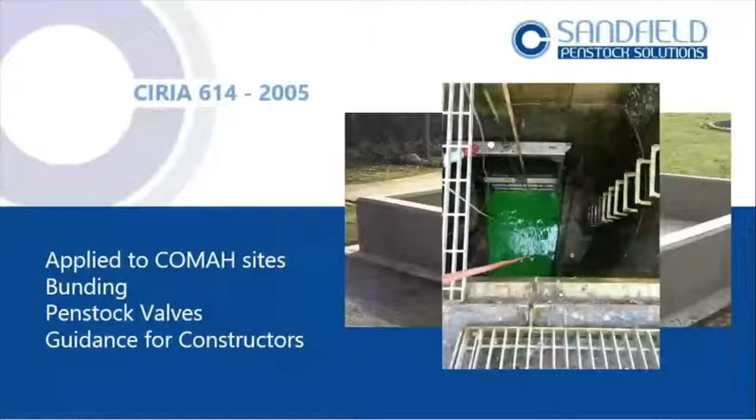And as I say, it's mainly for the construction industry. So it wasn't really being read by customers. It was looked at by the people actually building the site.

And I've just shown you here an image. This is showing a penstock valve. This is a recent job that we worked on. This is very similar, nice little actuator, penstock sluice gate valve. This valve here actually is in good condition, nothing wrong with it, but it's losing 2,500 litres an hour. Obviously the green is the dye that we're doing a test with, but that valve actually is of no point whatsoever.

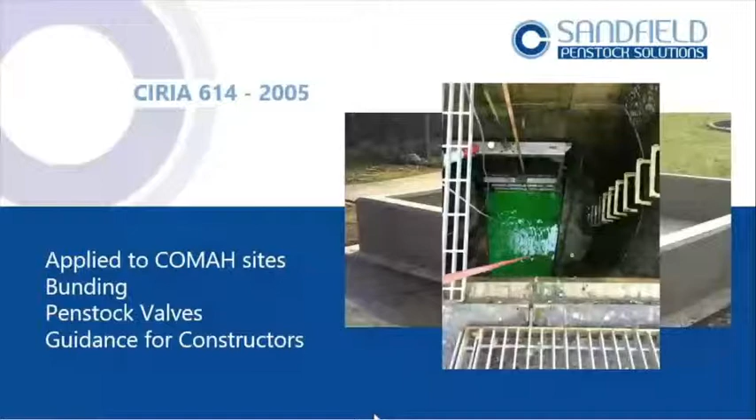The interesting thing is this design that if there was a fire, it would be a controlled burn. So they weren't really going to chuck lots of stuff on it. They'd have it as a controlled burn. But because COBRA had to sit, because we've got a problem with this ash cloud moving over to France and causing quite a significant impact, it was decided to tackle the fire. And the significant part of this is it's not the stock that really causes the pollution. It's actually the firefighting materials that's caused the water pollution.

So CIRIA 736 comes in, and that's the thing that we've been sat there and I've been brought into because of my background. These are the things that are coming out of the initial meeting. A document that's universally applicable to every site, not COMAH sites, all businesses, even a one-man band owning a garage. We're saying that they should understand what happens in my garage if I have a fire and I've got a load of barrels of oil, cutting oil. What's the impact I could have on the environment?

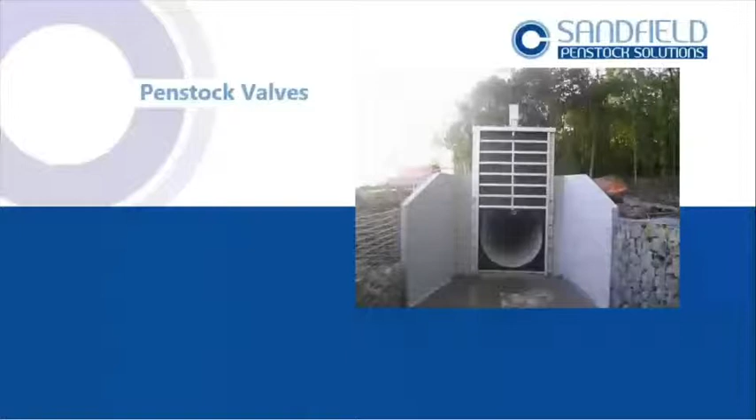Penstock valves, a bit of a bugbear for me, is because these are what people install and keep installing. They're not really fit for purpose. They were never designed for flow control and some isolation. You've got to have the right product. You've got to think that when you have a fire, could be part of a power cut. So these devices must work when there is no power. So they need to be off grid.

You can't have them connected into the main compressor line and running off an air line or running off mains power if the first thing that you've lost is power and you can't control the valves. They're normally out in the sort of middle of nowhere as well at the end of site. So it's very important that there's some sort of off-grid controls to them. They've got to be operable, as I said there. So they've got to link. So you need systems that are designed specifically for that.

Very little thought is put into what this valve is actually going to do. It goes up, it goes down. Nobody bothers to check whether it actually seals the flow, which is absolutely essential. They've got auto monitoring, but they're quite slow. They don't react very quickly. They're not really the right product. They never were the right product.

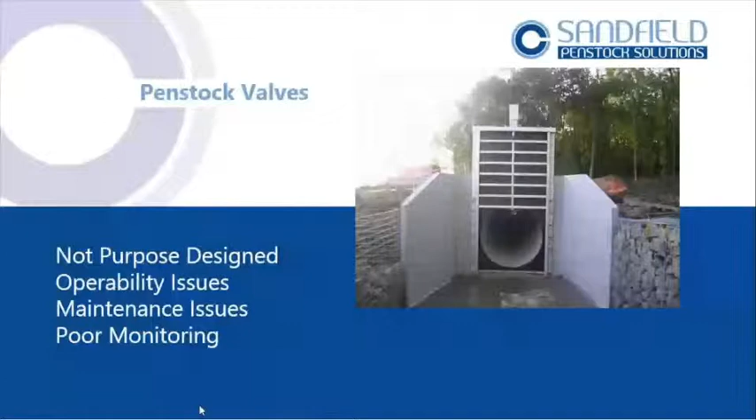They're a flow control device with fantastic uses in the water industry and where you've got considerable flows. What we have to look at here is when you're looking at pollution containment, there is no pressure. The flow is just a nice gentle trickle potentially from the site just running into the drains.

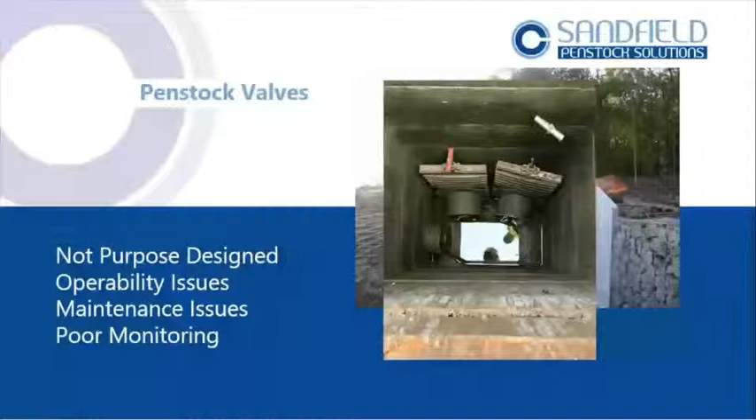So you can see some of these pictures that I've just put in here. These are typical examples of what we see at sites that are fitted with systems. No thought. These valves have gone in, great idea, but no ability to actually get in there to maintain them. This one is actually a good one because it's a site that I dealt with, which is one of the case studies in the CIRIA guidance on page 162, if you want to read it.

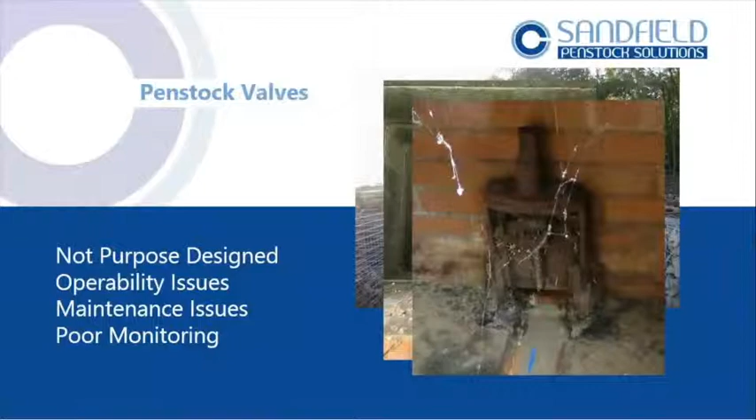This is where a penstock valve was closed as part of a tertiary system, and it leached cyanide into the River Anker and caused a major fish kill. I think it was 33,000 fish in total. Significant impact to the business. And that is just because of the wrong products.

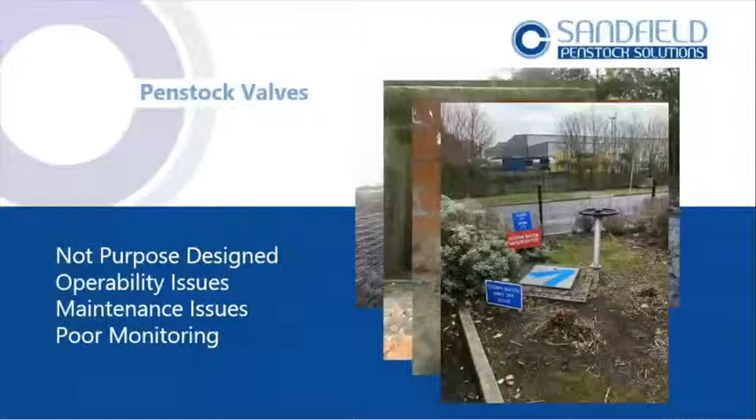And these are typical where you've got manually operated valves. In the event of a fire, can you actually operate a manually operated valve when you've just evacuated your site? Have you got the right people there? And do you know it's actually worked? Another typical example where somebody's put a penstock valve in and then decided to concrete around it. So it's a non-serviceable item.

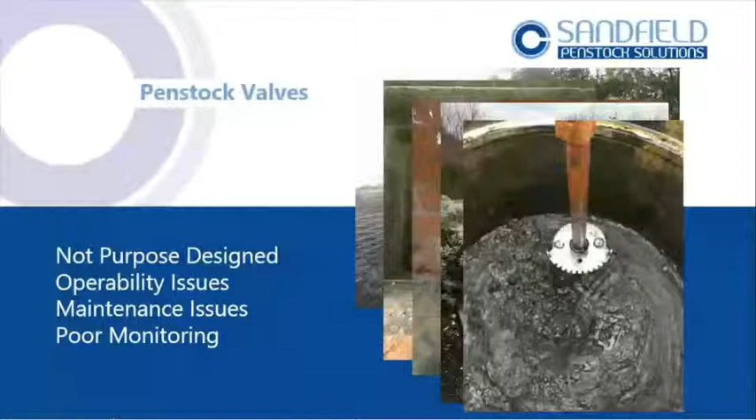With these bits of kit, there are significant changes within the guidance where we're asking people to service these systems and show they're serviced and show they're working. So a really big driver to the technology, which I'm going to come on to next, is the sentencing guidelines. Hugely important if you haven't really understood this part of it, but we've created a punishment, a deterrent, and the removal of any financial gain.

So in other words, if your business is running at a risk where pollution is insignificant, we don't worry about that. And there are a lot that do that, and a lot that don't. The fines are based on your total group turnover. So you might be a small part of a large company, but it will be based on your total group. If you're owned by a big international investment company or you're Thames Water, your fine is related to your total group turnover, not profit, turnover.

That's the step change, with a lot of businesses suddenly realizing that the management of water and what happens when a disaster takes place needs significant investment. It needs good drainage design. It needs good containment design.

Thames Water, obviously, you see there, £20 million fine. I think you'll also find Tesco was fined in 2017, I believe. That was for quite a minor oil spill, really. But again, it shows that if you're a company of that size, you shouldn't be having these pollution incidents. You should be employing the best technology and the best systems to prevent them happening.

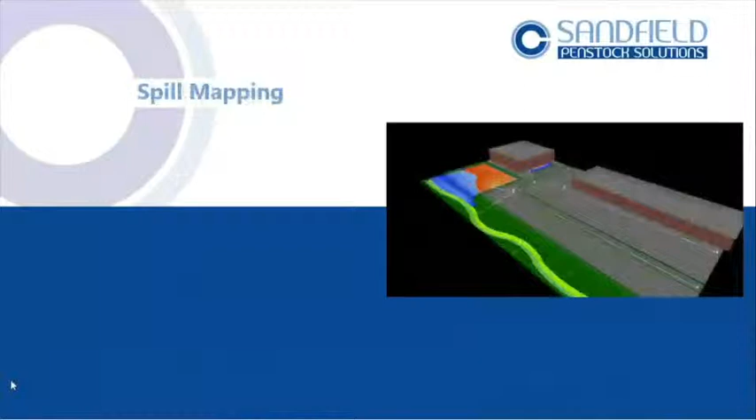So now I'm coming on to our products and products that I think are significant. Something I call spill mapping. If you read the CIRIA guidance, you'll see it's a case study on page 130. And this is a replica of that site to create a much simpler image that I'm going to show you.

What we found with Buncefield, whilst I was on the committee, was that Buncefield had no evidence or idea what a pollution incident would look like. Why this is really important is because people were placing containment valves in, building tertiary containment off drawings. So there's some effort going into it. But if you're the owner of a site, you probably don't have the skills to understand that drawing. So what I could see was that sites were installing and investing in equipment with no actual evidence that what they were investing in actually worked.

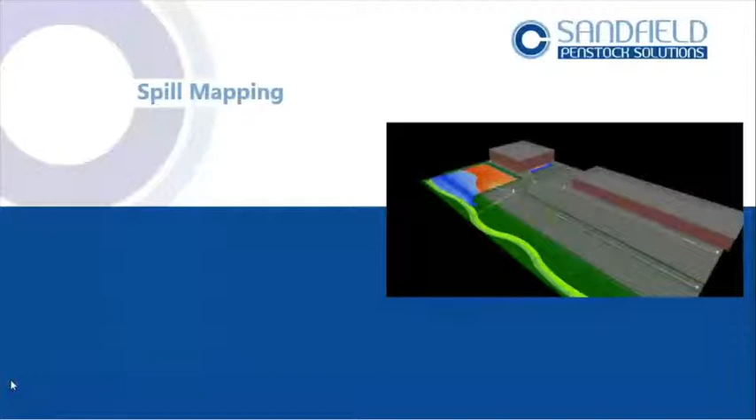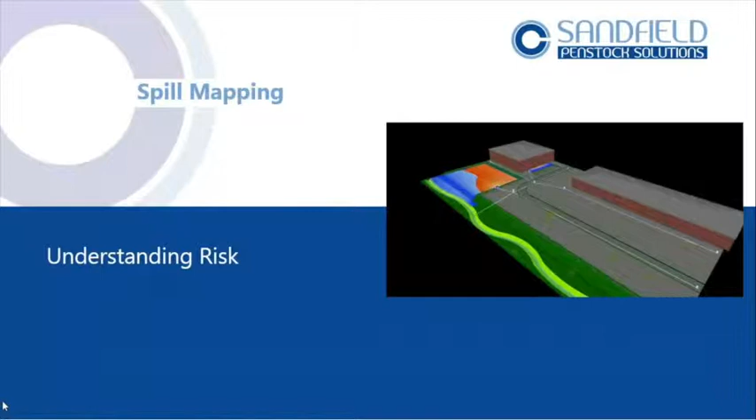So where you go now into the CIRIA guide, understanding the risk, you'll see there's a section 4.3.3. Now this is about looking at how rainwater impacts a pollution event. So as I'm doing the guidance, we're looking at this because there is no sort of benchmark, and we realize that the guidance is allowing us to set up a system so we can actually empower decision makers by using what's set out in the guidance to say a 1 in 10 year rainstorm event, loss of whatever stock we're considering we're going to lose, and whatever your firefighting response is going to be, gives you a volume.

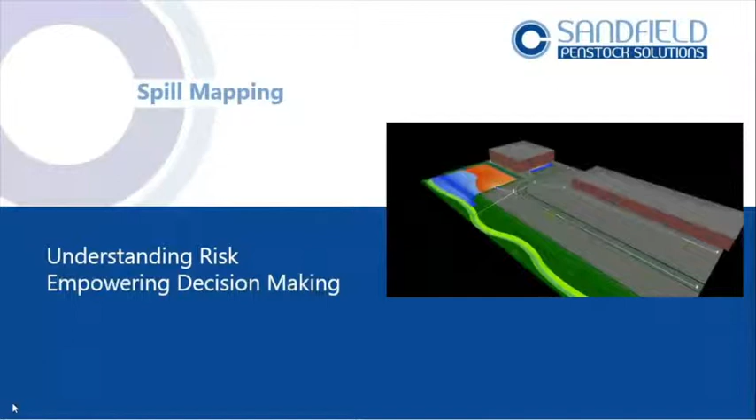And by that volume, through MicroDrainage or TrueFlow, whichever software you're using, you can actually then carry out your flood modeling software, which the Environment Agency helped develop and produce, which is now so significant in the design of new builds, blocking the drain. The assumption is that somebody has selected the right valve and not a valve that leaks. So it's really important to select the correct valves. But once you've done that, you're creating a model and you can see the above ground flow paths. You can actually then see whether the system you've got works, and you can see what you need to design.

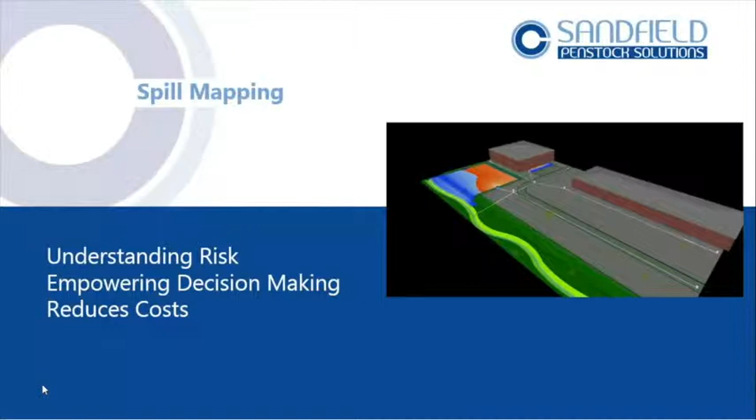This reduces costs significantly in a major way. And we've done sites where originally they were going to build bunds around facilities. Actually, by doing it in the tertiary, you were able to control it even better. And I'm sure that if you present this in front of the Environment Agency, which we have done with several companies, which I can't really mention their names, we've evidenced this to the agent from the Environment Agency to show them what we're going to design. And this helps deliver your permits. It helps deliver your scheme, because the Environment Agency officer, if they can see what you've actually designed actually works, it makes things a lot easier. And it actually saves costs significantly.

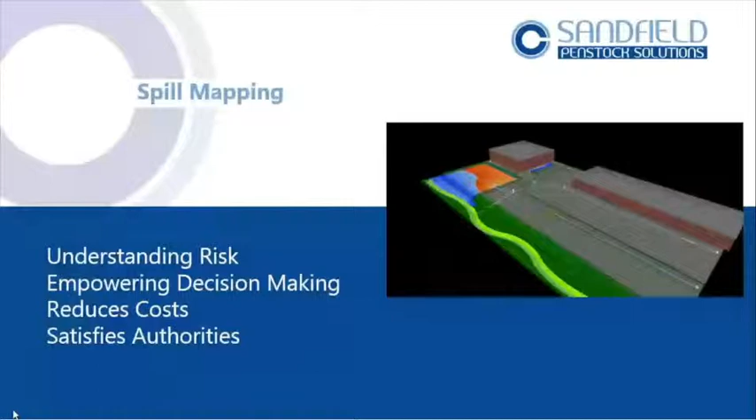It's satisfying the authorities. So what I've got here is an image that I'm going to run now. This is what I call an incorrectly designed system. So let's just watch it run. Where my arrow is, that's where the valve is placed. That's where the contractor actually fitted the valve at this site. And as you can see, it's filling this area here, the staff car park. We're coming out of here and we're flowing into the river. This is the river below, and we're actually having a pollution event. This is the attenuation design. It's actually the loading bay, and it's quite a simple image, but the system was designed, put into place, but somebody made an error of placing the valve in the wrong place.

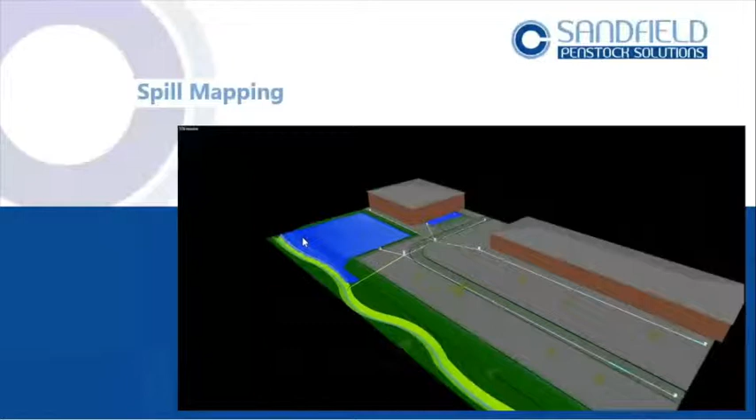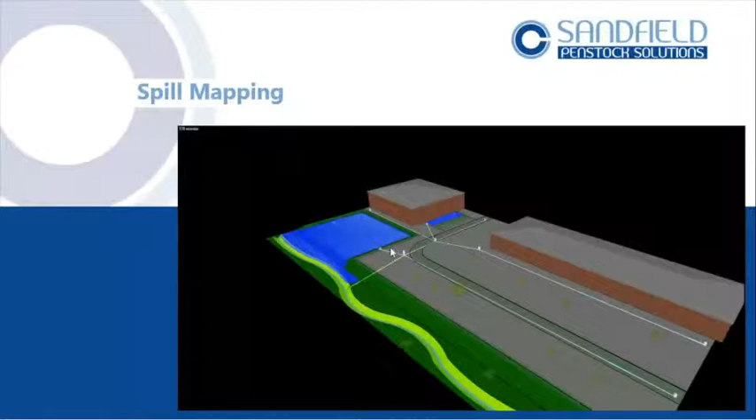Looked okay, and it's quite common. We go to loads of sites where the valves have been bought. Nobody knows whether they actually work. Nobody's ever had a significant event where they had to shut the valve. They're just assuming they work, and I can quite quickly see that some of the sites we work with don't. So what you've got here is a huge plan. This animation obviously wasn't done, and somebody's put a valve in. That's where it's got to go. I have to assume that valve does seal. I have my doubts about this one personally, but what you end up with is a system that doesn't work.

So when we go to this one here, I haven't changed anything. We haven't changed any of the volumes of water, the volumes of the containment. Nothing's been changed at all. So all we're doing here really is using the design that was done. So this is a roadway. This is the loading bay. So this is where you're dropping down to. So this is our natural area we want to flood and push the pollutant into. This is how it's been designed. And we've moved the valve back. We've moved the valve to another manhole that had to be created. So this is why it was originally wrong.

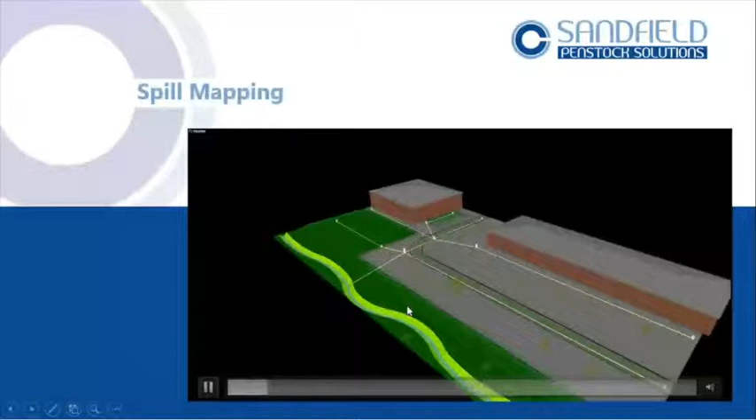But now as we've run the model, it's the same event. It's the same volumes of water. It's the same thing that's happening. But now we've got control of it. This is the significance of being able to see what the design is. Key people involved in a project can actually see what you're going to build first. What I personally see is lots of sites. The EA might walk onto site and say, you need a containment valve. Right. That's what we're going to do.

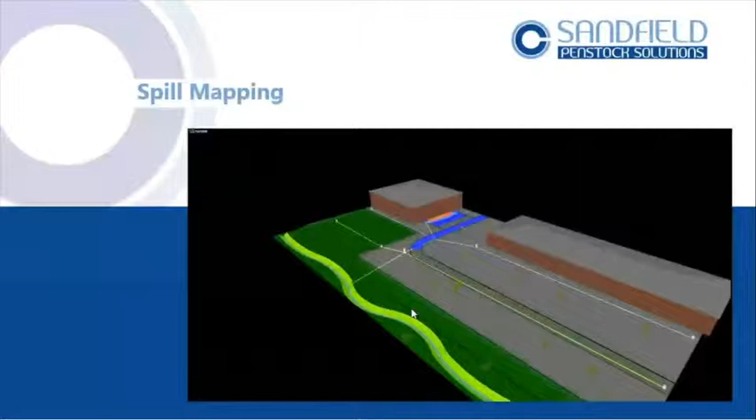We're going to put a containment valve in. No thought into actually, will that containment valve do what I expect it to do? And this is referring back to CIRIA, using the guidance, using section 4.3.3, which gives you the volume of rainwater, which is your worst case scenario, looking at what your materials are and looking where you're storing materials. Once you've modeled the volume, you can design your containment to actually work.

So things like Buncefield wouldn't have happened. If you'd have modeled Buncefield, you would have seen the errors, you would have seen the faults. One thing they needed to understand, which many sites don't, is a penstock valve has probably got a leak rate and it's not the right product. Valves that contain drainage need to be a drop seal design.

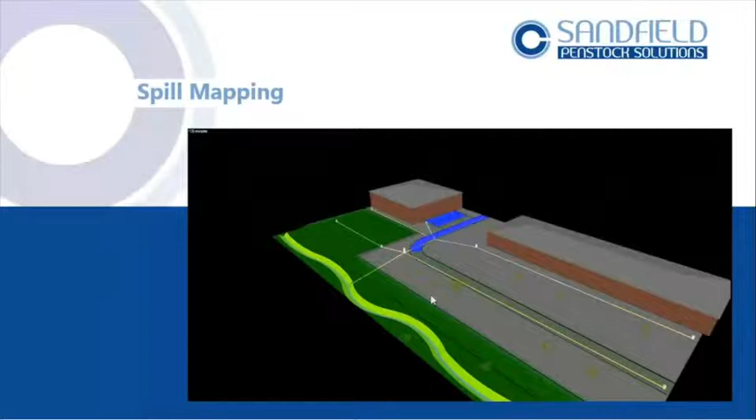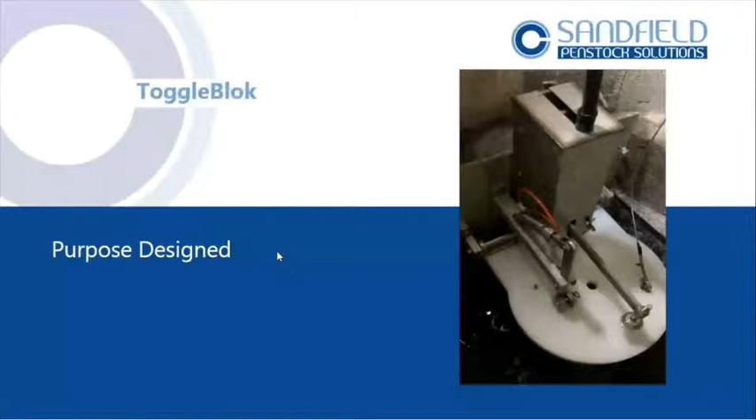What I've got here now is a little bit about the ToggleBlok. So I've moved products along from Drain Block, from all sorts of products that I've made over the years, and EnviroValve. This is where we're at now. It's purposely designed for pollution containment. It's not designed for flow control. It's designed for one thing: if you have an incident, I want to close a drain instantly. I want to close it off quickly, in about 5 seconds.

So what we have here is a valve that's simple. It's got its own power supply, so it's running off a battery. It's got its own pneumatics. It's operable, so you can connect it into your fire alarms, anything you want to connect in. M2M control it, so you've got control of that. Self-contained, so you're not putting in mains power to this. You're not putting any air supplies or anything off-site. This is totally one piece of kit, and it's adaptable.

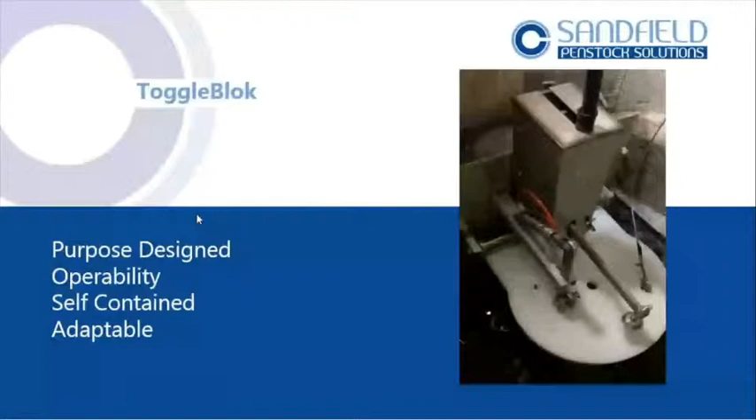So this picture you see here, and I'm going to run it hopefully as a video in a second, is actually fitted into an existing manhole. We've done the bench work. It's very similar to fitting a Hydro-Brake. You're creating a flat face, and the valve just bolts onto it. Ideally, you'd have a catch pit, so you'd have a bit of a drop, but we quite often have to do it without. Significant difference, if you notice from the drawing, this is a small piece of kit, and it's all modular, so it's very light. So it's plates, it's guards, they come on, they come off, they bolt off.

If this was a penstock valve, we'd be putting it in with a crane. This is no more than about 40 kilograms for the heaviest part, and what you're looking at there is a 500 mil valve. So it's quite a significantly big valve doing exactly what it needs to do, but it can be put in quite easily. It's quite lightweight. You haven't got the safety issues that you normally have with a big penstock valve.

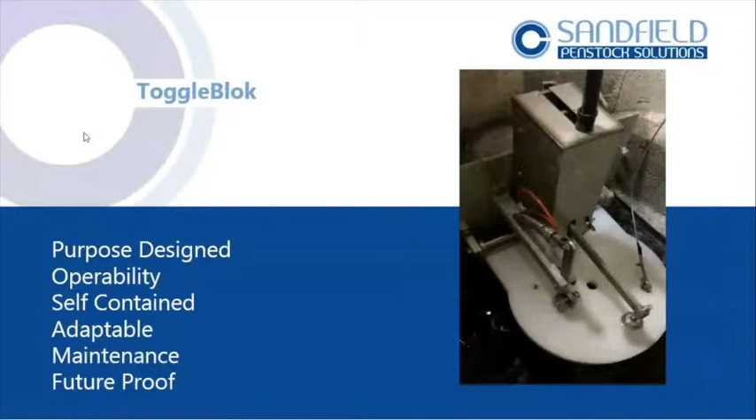We say these are future proof. They're shown in the guidance, so if you do read the CIRIA guidance, you'll see it on page 34, actually bolted to a penstock valve which didn't work. It's another point of why you've got to get the right valve selection. It's future proof. Hopefully this animation will run. So this is the animation now running.

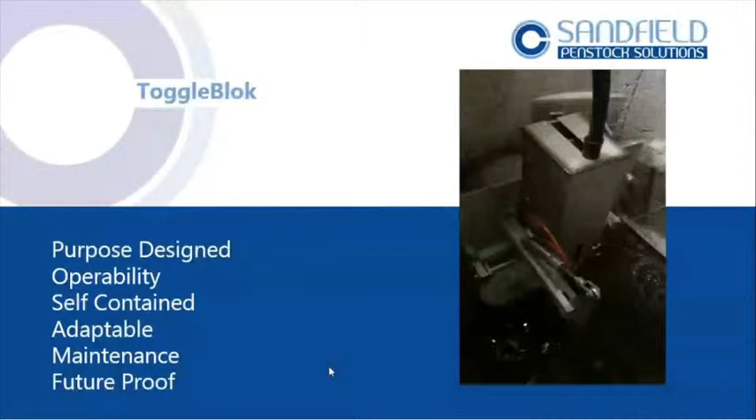That's how the valve works. The flow is pushing against the flap, so it's what we call on-seating. That flap has just dropped into the flow. We'll open it now because what we're doing is just a test. The water is pushing that flap shut. We have a little bore hole in the center of it. That will release any lock pressure to allow a flow through, because what we're not looking for really is to suddenly release the whole flow.

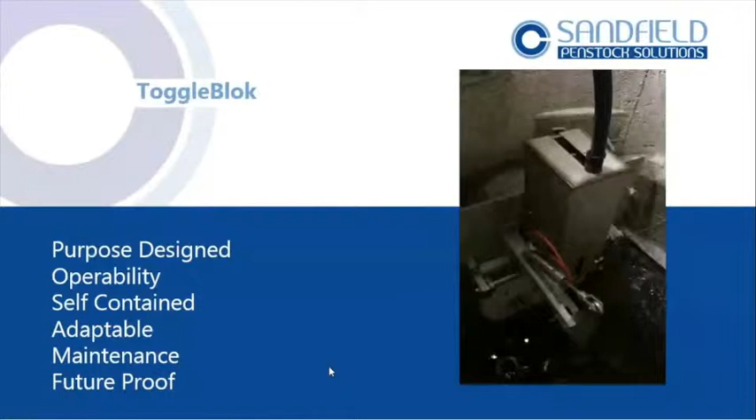The significance about this is we have got a system here that is designed for pollution containment. So when you've operated this system, it communicates to you. This one now will just reset itself afterwards. It's back in action, ready to be used again. That is a significant difference from what's already on the market. It's got to be quick. Whatever you're doing, it could be a spillage, so you want a valve. We do a lot of sites that say we close our valves whilst we've got production, so they could be closed for a whole day.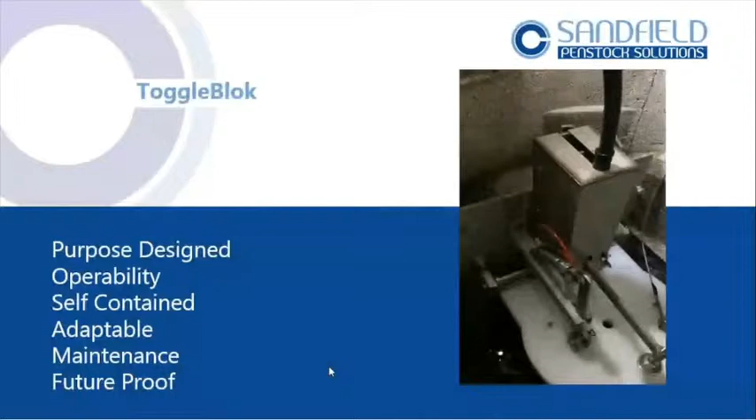I think this is really bad advice, because a drain needs to flow to clean itself. Allowing it to build up detritus and sediment actually causes it not to work. These valves are designed so you link them into your system, however it is - a panic button or whatever you want - and you're able to shut a valve in 5 seconds. On an event of an incident, bang, valve shuts. There's no need to hold drainage, which is not how the drainage engineers designed it in the first place.

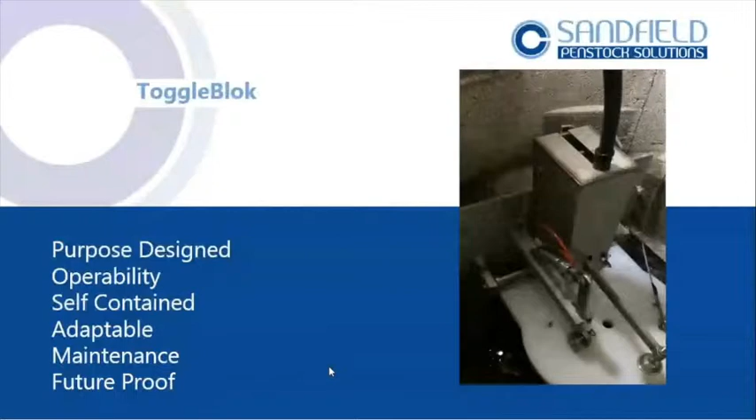Some images here - these are installations at typical sites. This is actually a chocolate factory, and it's only small. You see the little unit on top there - that's a remote button that connects into a fire alarm. There's no cables. When the fire alarm goes off, it sends an M2M message, basically like a mobile phone, and communicates with the valve. You can cable it in as well if you want, but we're trying to keep it simple. This is basically a complete contained system - there's no need to add anything.

Solar power, as you see, battery, off grid. You can put mains into it if you really want to.

Recently this was for an airport where we're monitoring pH. Significantly, what they're looking for is their pH levels, and they want to hold their attenuation ponds when the pH levels were high or low. So it seems natural that if you've got pH monitoring equipment, you'd want to connect it into a valve so it can stop the flow instantly. What we've done here is simple: the pH system sits on the pond, connected into our valve just next to it. When the pH goes out of range, it drops the valve, which stops the attenuation pond, and alerts staff by an M2M message and network message since it's connected into their network.

It's also linked into their control tower so they can operate the valves from there. What this means is instead of saying 'we've got a monitoring issue or discharge consent issue, well, we let it go for the last 2 days before we spotted it' - this is connected to a dead stop. As soon as it goes into alarm, it activates a valve, giving you a communication: I'm in alert, I need to come and do something about it. It really stops the scenario where something goes into alarm and somebody has to respond and do something about it. This is going alarm, stopped.